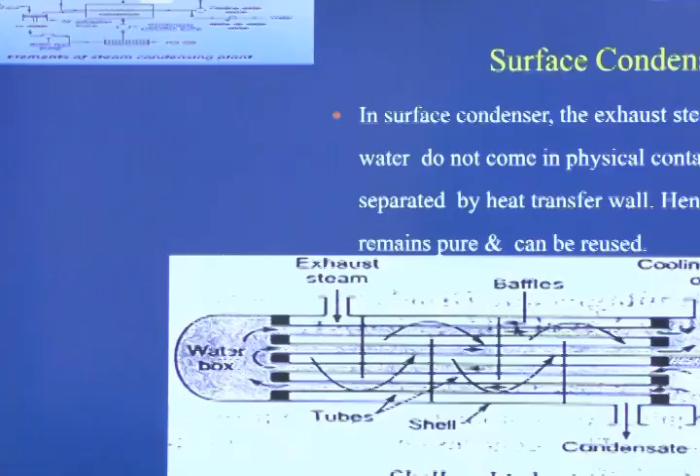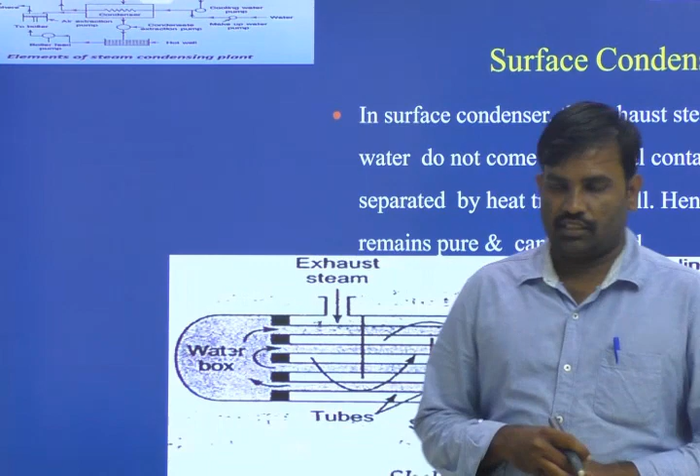In the previous lesson we discussed about jet condensers: the different types of jet condensers, how we convert exhaust steam into hot water with the help of cooling water, how we reduce the temperature of exhaust steam using a cooling medium, how we remove air and uncondensable gases from jet condensers, and what are the advantages and disadvantages of using jet condensers, which is why we are introducing surface condensers.

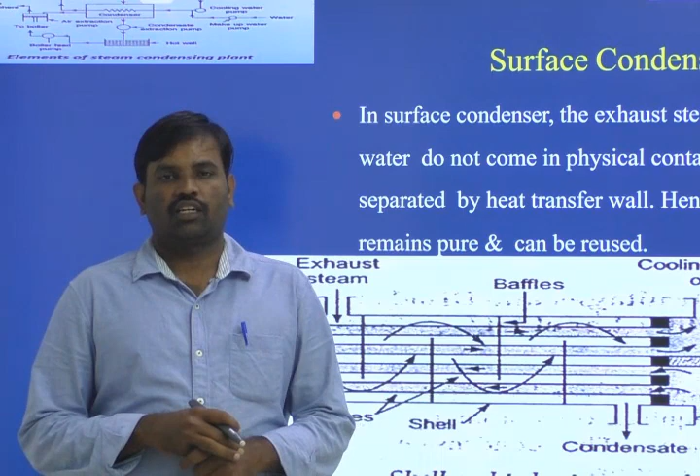Today we will see the different types of surface condensers, how we reduce the temperature of exhaust steam in surface condensers, and compared to jet condensers, what is the advantage of using surface condensers in the steam condensing plant.

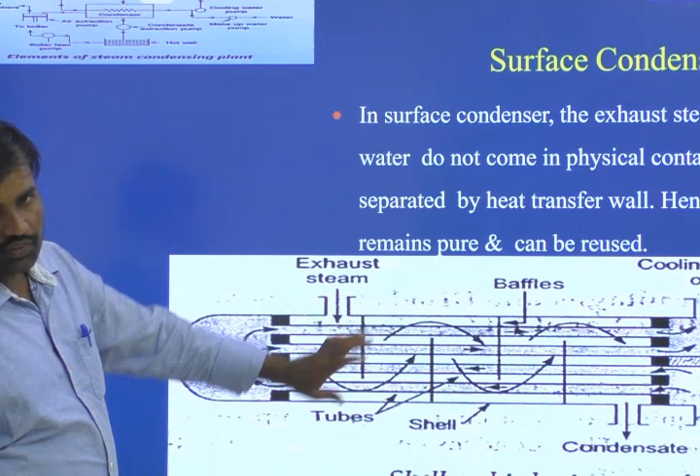Let us see the operation of surface condenser. The basic objective of a surface condenser is shown in this figure, where you can see the flow direction of exhaust steam and cooling water, and how the exhaust steam exchanges its heat to the cooling water inside the condenser section.

In a surface condenser, the exhaust steam and cooling water do not come into physical contact; rather they are separated by the heat transfer surface of the tubes. Hence the condensate remains pure and can be reused.

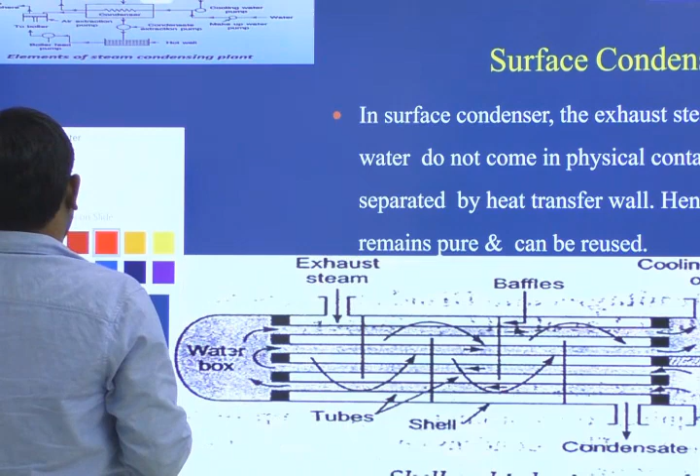In case of jet condensers, the condensate mixture is not pure. In case of surface condensers, the condensate mixture is pure and can be reused. We can reuse the condensate mixture coming from the surface condensers.

The arrangement of the surface condenser is like this: exhaust steam is introduced into the surface condenser and made to flow over the tubes, while inside the tubes we arrange the flow of cooling water. During this flow process, the exhaust steam and cooling water exchange heat through the thickness of the tubes.

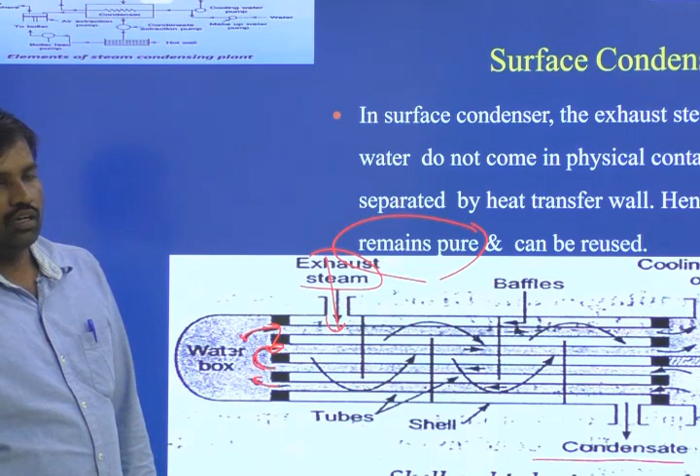Then automatically the exhaust steam is converted into condensate mixture. That condensate mixture is collected and sent to the boiler section with the help of a feed water pump.

Next, the downflow type of surface condenser. See the arrangement: exhaust steam enters into the mesh of the surface condenser, meaning the flow of water inside smaller tubes, which we see as a mesh. Inside the tubes we make the water flow, and over the tubes we arrange the flow of exhaust steam from the steam turbine.

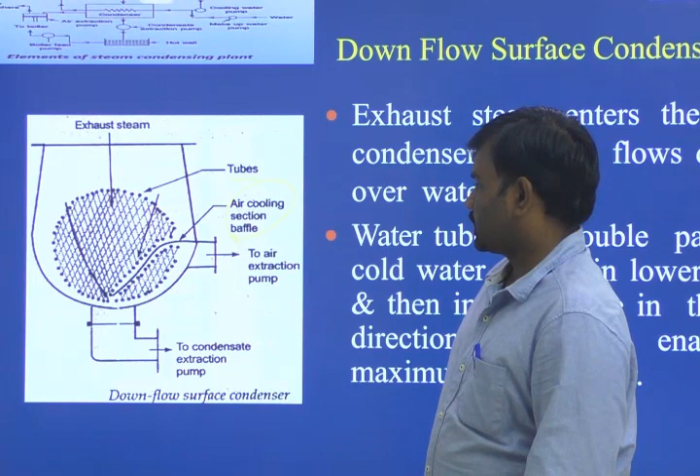The steam then goes to the air extraction pump, where we extract the uncondensable gases from the condenser body in order to maintain vacuum pressure inside the condenser.

Then to the condensate extraction pump, we introduce the condensate mixture to the pump, and the condensate mixture is sent back to the boiler section for reuse.

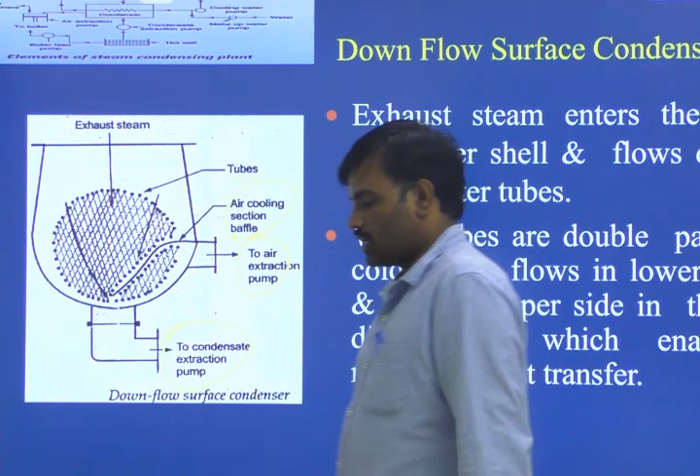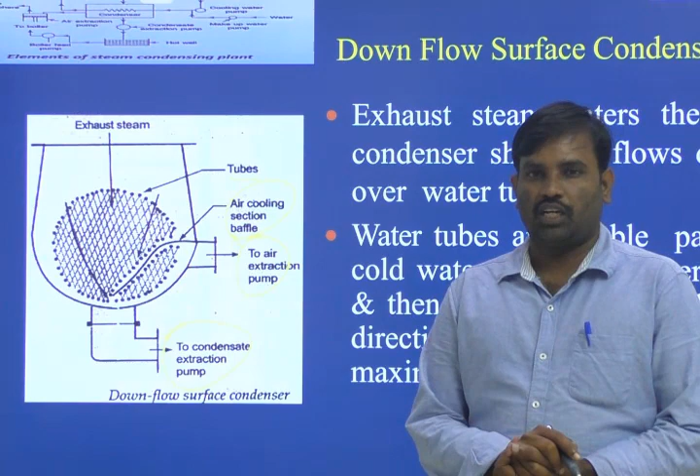One of the most important advantages of surface condensers is that we can reuse the condensate mixture after the condensation process. In case of jet condensers, we are not reusing the condensate mixture and not sending it to the boiler section. Only with surface condensers can we reuse it.

Why? Because there are no dust particles and metal particles, since there is no mixing. In jet condensers, both the hot fluid and cold fluid mix together inside the condenser section during the flow process. In surface condensers, both fluids do not mix and instead exchange heat through the thickness of the tubes. That is the main difference between surface condensers and jet condensers.

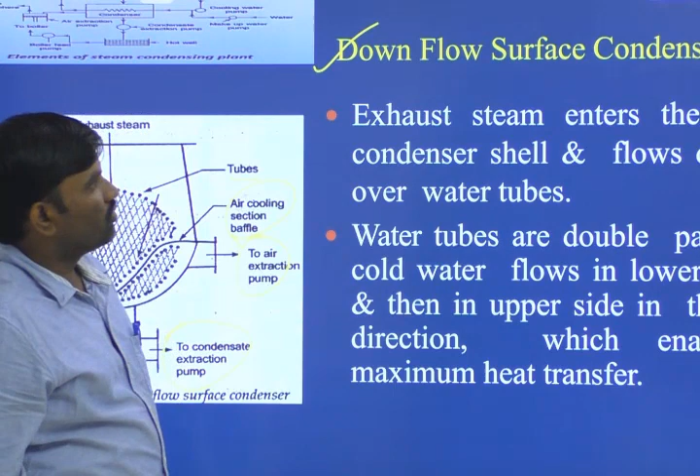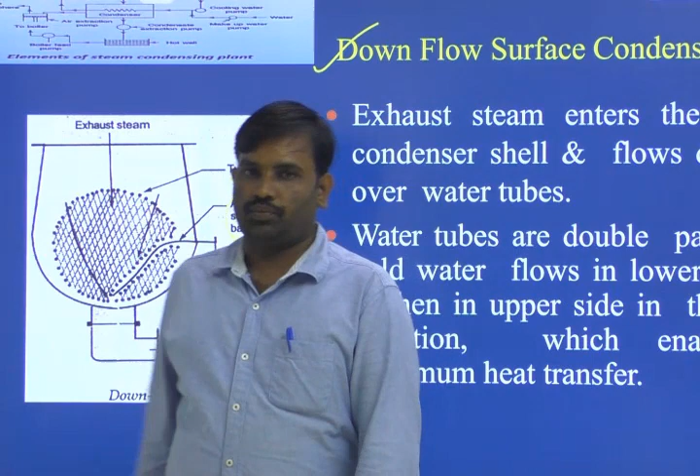See the next type, the downflow type of surface condenser. Exhaust steam enters the top of the condenser shell and flows downward over the water tubes. You can see the arrangement: the exhaust steam flows in the downward direction over the tubes, and inside the tubes we arrange the flow of water.

Inside the tubes, water is flowing, that is the cooling medium, and over the tubes, we make the exhaust steam flow. During the flow process, the exhaust steam exchanges its heat to the cooling water.

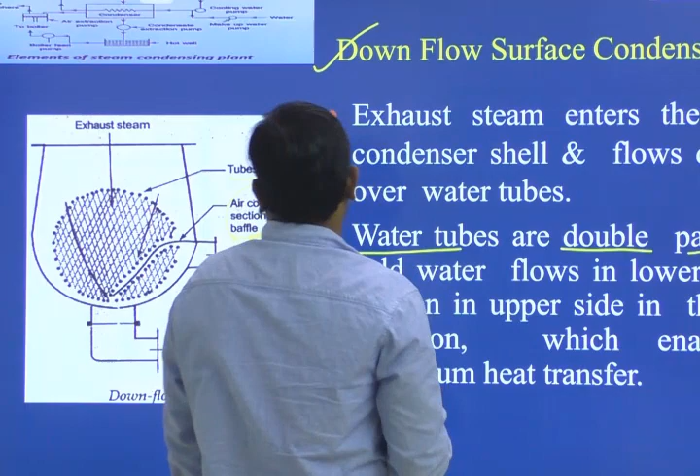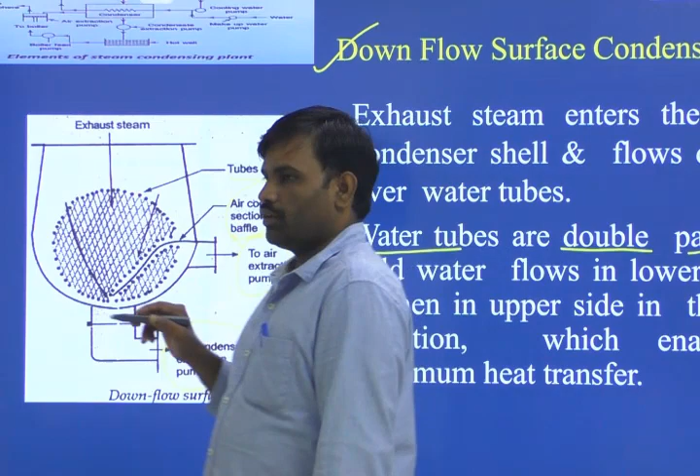Water tubes are double passed type, and the cold water flows in the lower side first and then in the upper side, in reverse direction, which enables maximum heat transfer. Double passed type means the water flows inside the tubes two times. In one pass we exchange heat, and in the second pass we also exchange heat. Two times exchanging means more heat transfer takes place between the hot fluid and cold fluid, so we can extract more heat from the exhaust steam.

Then we can easily convert the exhaust steam into a pure condensate mixture. That pure condensate mixture we send to the boiler section for reuse in generating exhaust steam. After generating the steam, we again reintroduce it into the steam turbine, and from the steam turbine we produce the power output.

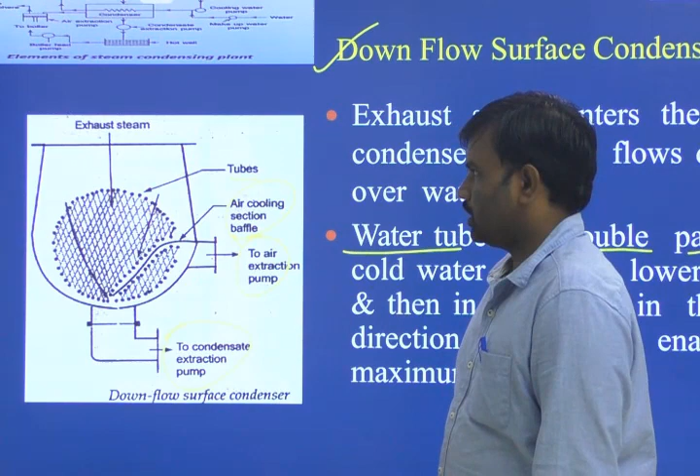After that, the exhaust steam again enters the surface condenser. In that manner we repeatedly operate the steam power plant with the help of different types of surface condensers, continuously receiving the exhaust steam from the steam turbine.

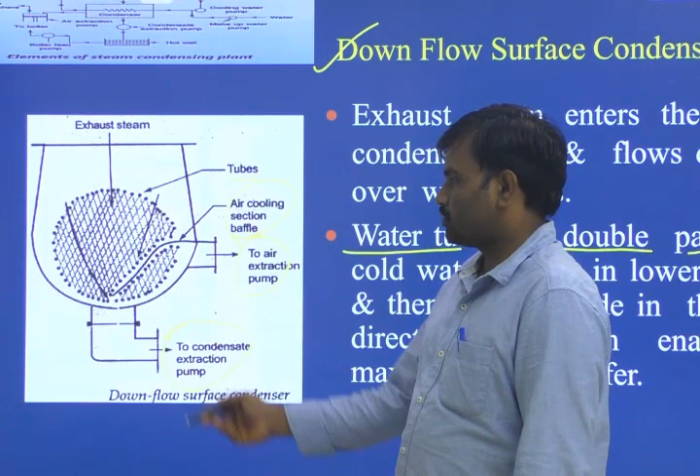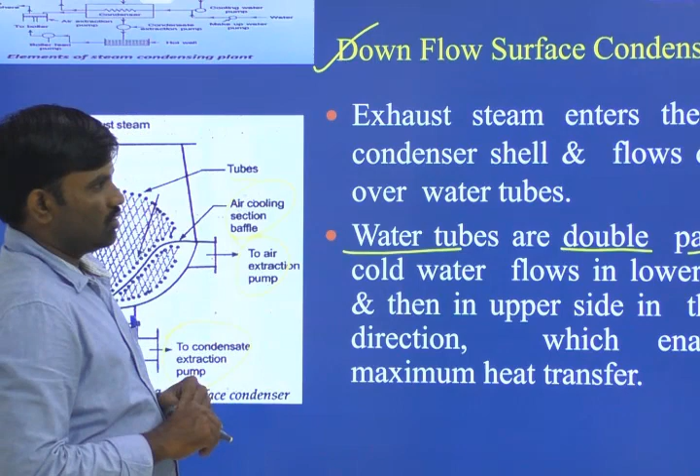During the heat extraction process, heat exchange takes place from hot fluid to cold fluid, meaning the exhaust steam exchanges its heat to the cold water flowing inside the tubes. In the downflow type of surface condenser, the tubes are double pass type. Because of double pass, double heat exchange takes place between hot and cold fluid, reducing the temperature of the exhaust steam and converting it into condensate mixture, that is hot water. We arrange the flow direction of hot fluid and cold fluid based on the type of condenser.

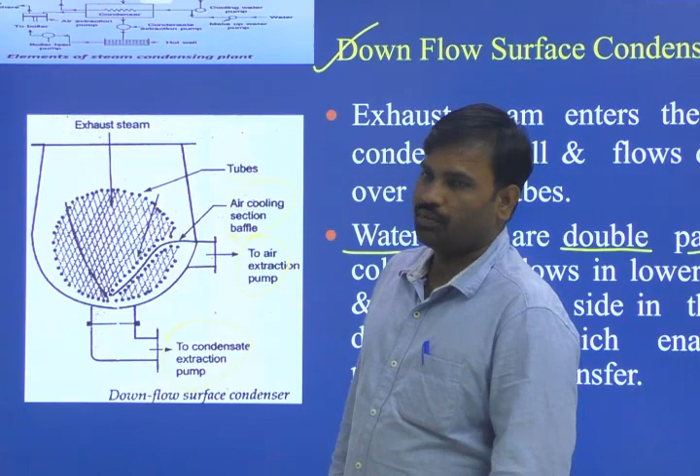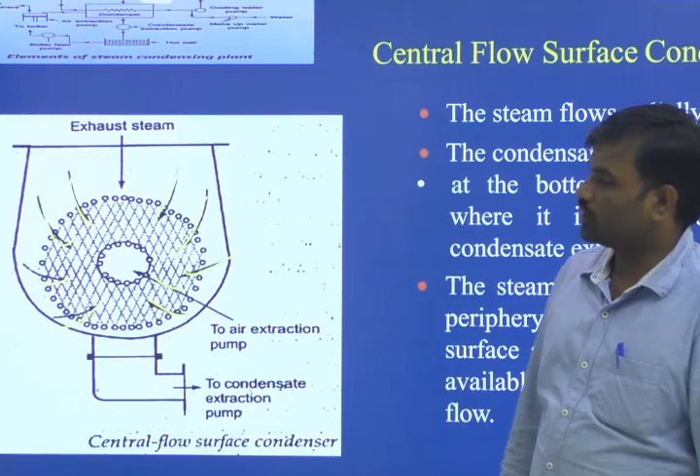Next, the central flow type of surface condenser. The steam flows radially inward. In the previous type of surface condenser, the steam flows downwards, but in this type, the steam flows radially inward, entering the condenser section through the radius. Because of more entering points, we can increase the heat transfer rate in the central flow type of surface condenser.

The condensate is collected at the bottom of the shell, from where it is taken out by the condensate extraction pump. Always remember, the pump handles only liquid, that is condensate. If the condensate is not completely condensed into hot water, then we are unable to extract it with the condensate pump. For that reason, we use higher efficiency condensers for condensing the exhaust steam into hot water.

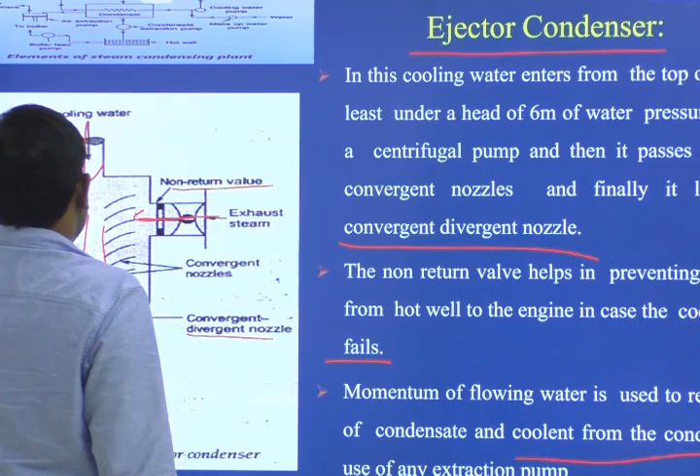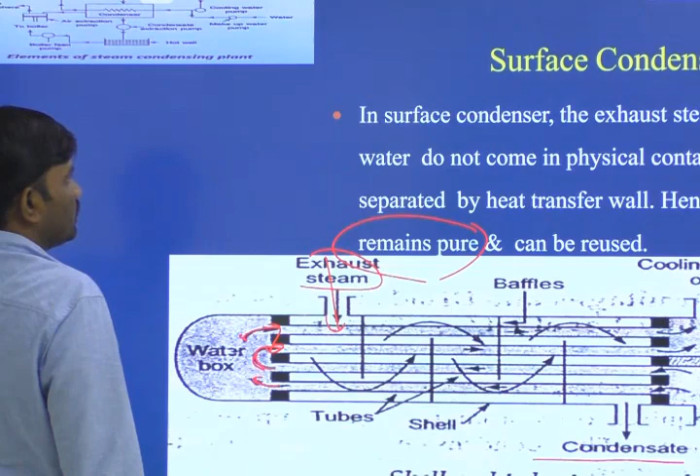The steam gets access to the entire periphery of the tubes, and thus a larger surface area for heat transfer is available compared to the downflow type. In the downflow type, we only introduce the steam from the downward direction, but in the central flow type of surface condenser, we introduce the exhaust steam through the radius, throughout the periphery, which helps us increase the heat transfer rate.

As I already told you, in surface condensers, compared to jet condensers, we are not mixing the two fluids. The hot fluid and cold fluid do not mix together inside the surface condenser. Only heat exchange takes place through the thickness of the tubes, and in that manner we exchange heat between the hot fluid and cold fluid, and for that reason we get pure condensate.

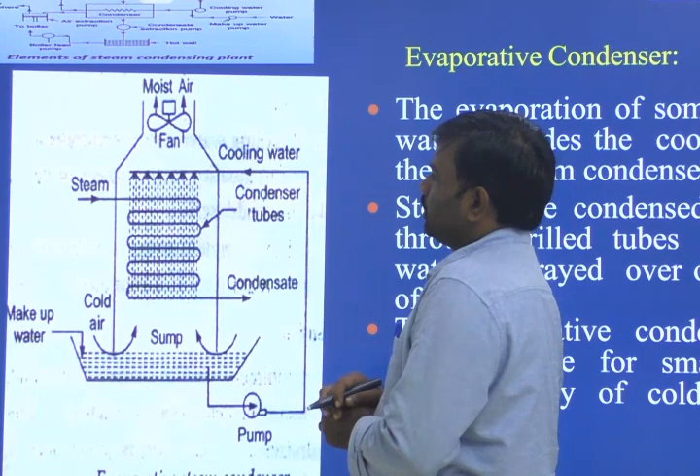That pure condensate we are using as hot water from the steam condenser, and from the steam condenser we are reusing the hot water for generating steam in the boiler section. See the evaporative type of condenser section. Here we are introducing two types of cooling mediums. Up to now we discussed only one cooling medium, that is cooling water, which we use to exchange heat between the exhaust steam and water. Both fluids exchange heat between each other.

In case of the evaporative type of condenser section, we are using air and cooling water. Both exchange heat between them and easily condense the exhaust steam into a condensate mixture, which as hot water we reuse in the boiler section.

See how to introduce the cooling water into the evaporative type of condenser, and how we use air as cooling medium in this section. Moist air is introduced into the outside atmosphere, and that moist air also carries some quantity of heat from the exhaust steam. The steam enters into the condenser tubes from the steam turbine.

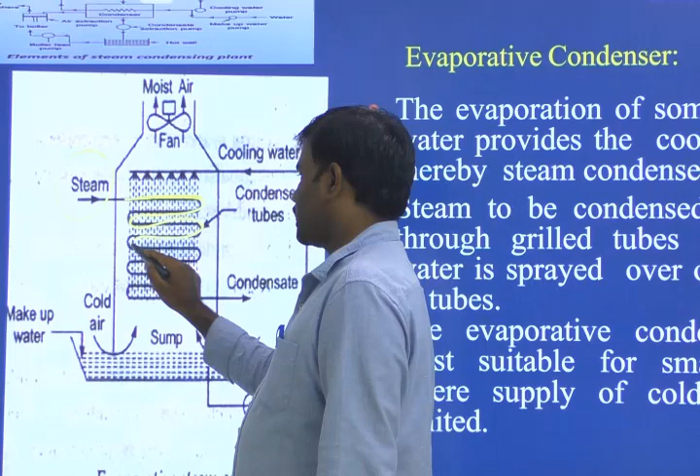The steam is flowing inside the tubes of the evaporative condenser. During the circulation process, over the tubes we make water and air flow. The cooling water is sprayed over the tubes. See the arrangement: from the sump we introduce the sprayed water, which flows over the tubes and extracts heat from the exhaust steam. Inside the tubes exhaust steam is flowing, and over the tubes we arrange the spray of cooling water. Because of the spray, we can increase the area available for heat transfer.

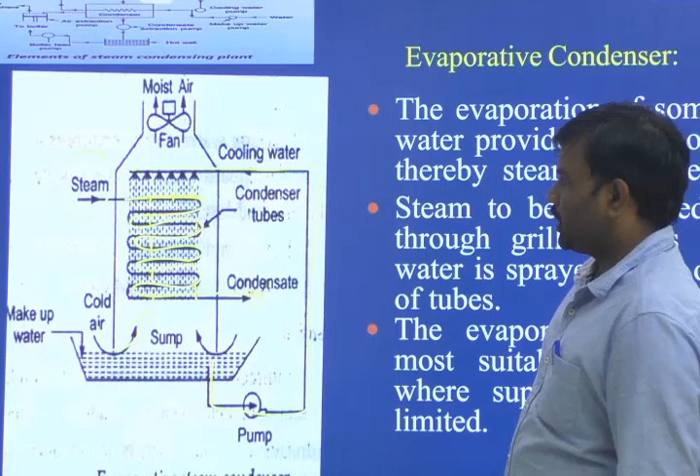Then automatically the exhaust steam temperature decreases and the exhaust steam converts into condensate mixture. From the bottom side itself we introduce the air, which flows in the upward direction. Because of the air flowing upward and the sprayed water flowing downward, the combined effect of sprayed cooling water and the cold air reduces the temperature of the exhaust steam and converts it into condensate mixture, which we reuse as feed water to the boiler section.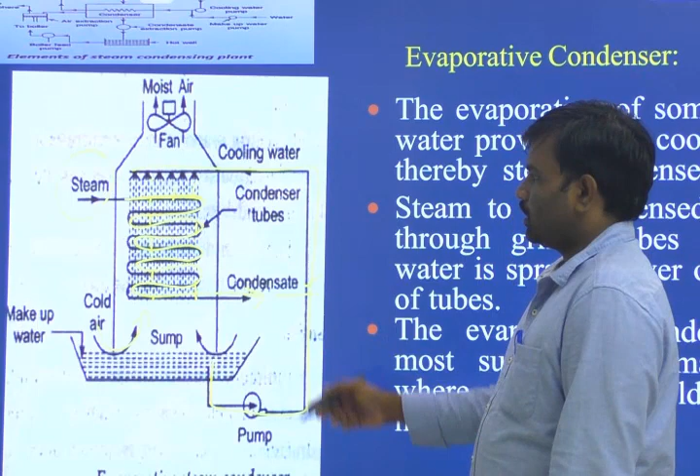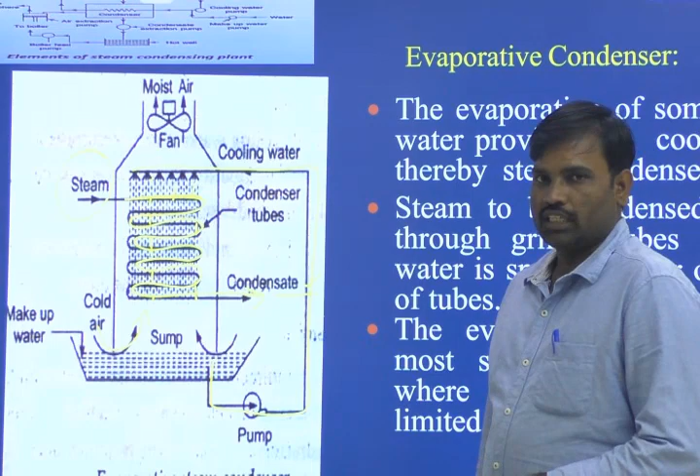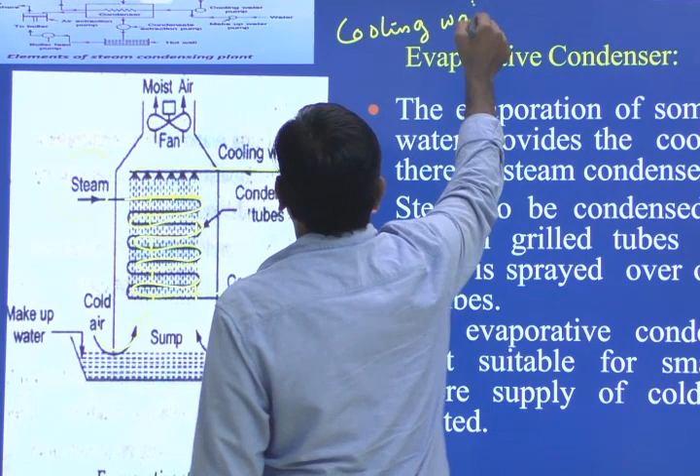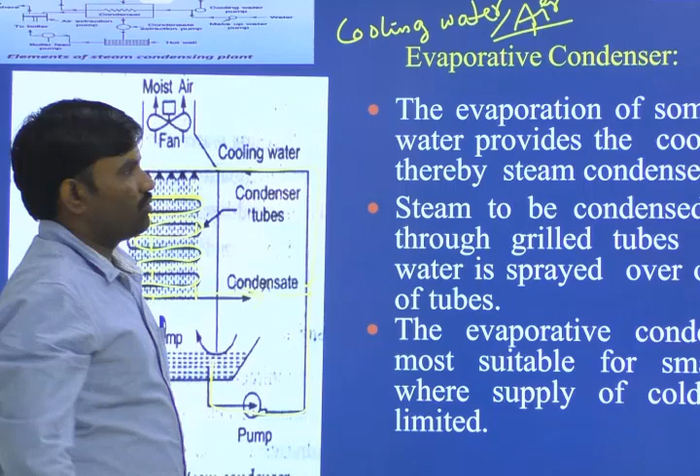In case of the evaporative type of condenser, we use cooling water and air as cooling mediums. Up to now we saw only cooling water as cooling medium. Here, cooling water plus air are used together. With the help of the combined effect of cooling water and air, we reduce the temperature of the exhaust steam. In the evaporative condenser, the sprayed water is evaporating, because during the heat extraction process that sprayed water evaporates, and the evaporation of some cooling water provides the cooling effect.

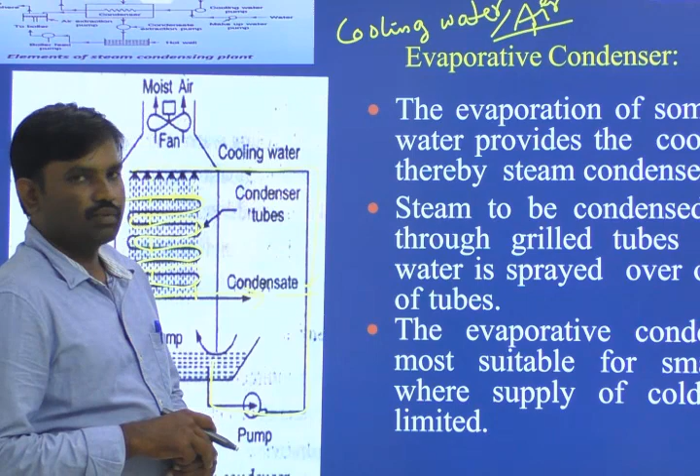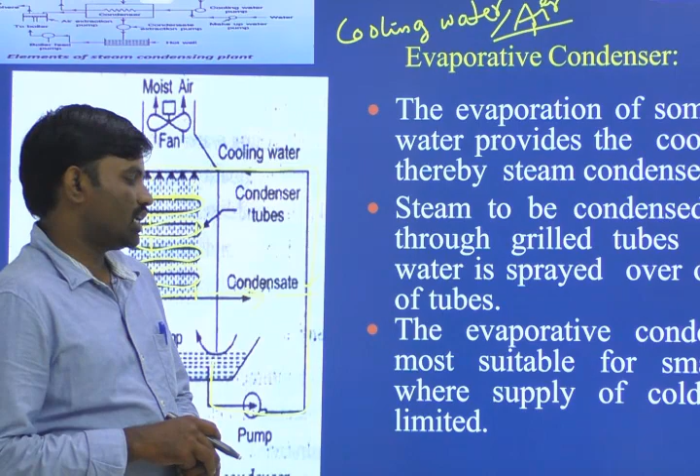Thereby the steam condenses. The steam to be condensed is passed through the grilled tubes and cooling water is sprayed over the outer surface of the tubes. The evaporative condensers are most suitable for small plants and where the supply of cold water is limited. We supply the cold water with the help of this evaporative type of condenser.

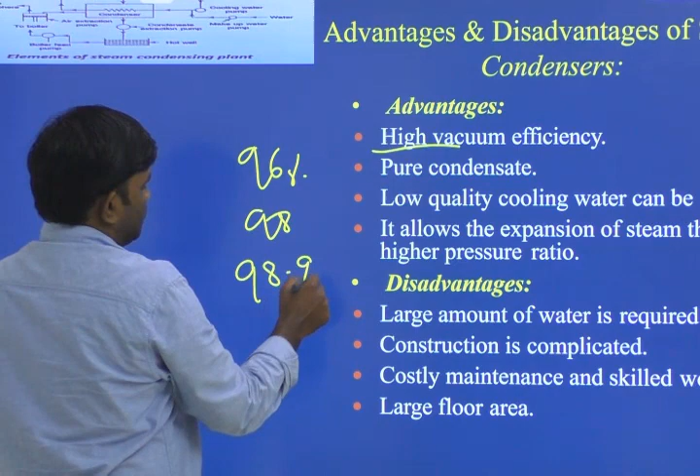Advantages and disadvantages of a surface condenser. See the advantages of surface condensers: we use the surface condenser for high vacuum efficiency. We always have to maintain higher vacuum efficiency. While solving problems, we get condenser efficiency values like 96%, 98%, 98.9%, and so on, which represent the vacuum efficiency of the condenser. This is because higher vacuum efficiency helps us extract the low pressure exhaust steam from the steam turbine. If there is no higher vacuum efficiency, then automatically the exhaust steam may not enter into the steam condenser device.

For that reason, we are providing higher vacuum efficient condensers to the steam power plants. We get pure condensate from surface condensers, and low quality cooling water can also be used, because the cooling water and exhaust steam are not mixing together. If there is mixing inside the condenser, there is a possibility of impurity in the condensate mixture. Since there is no mixing of cooling water and exhaust steam, we can use low quality cooling water.

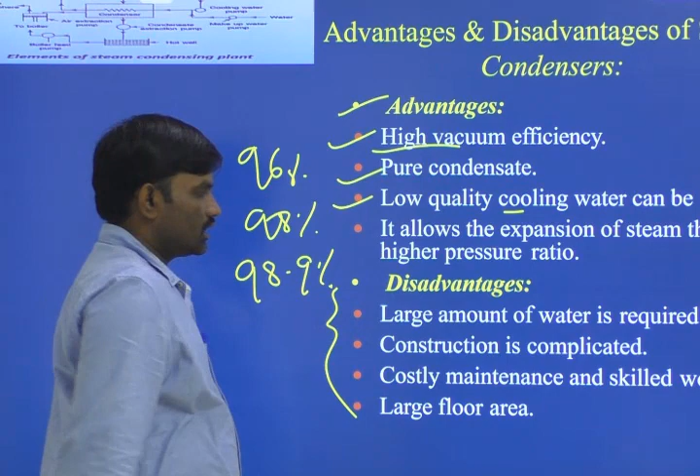Disadvantages of surface condensers are: a large amount of water is required, construction is complicated, costly maintenance and skilled workers are required, and a large floor area is required. These are the disadvantages of surface condensers.

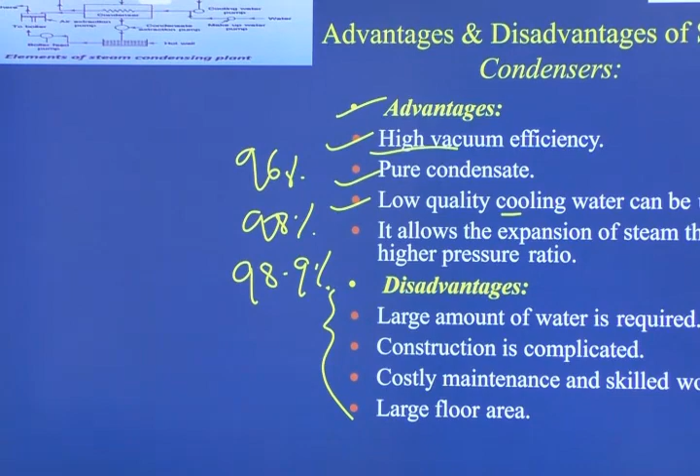Next, comparison of jet and surface condensers. If you compare the two types of condensers, jet condensers and surface condensers, you can know the advantages and benefits of both types.

In jet condensers, the cooling water and steam are mixed up. In case of surface condensers, both are not mixing together. In case of jet condensers, it requires a small floor space, while in case of surface condensers, it requires more space.

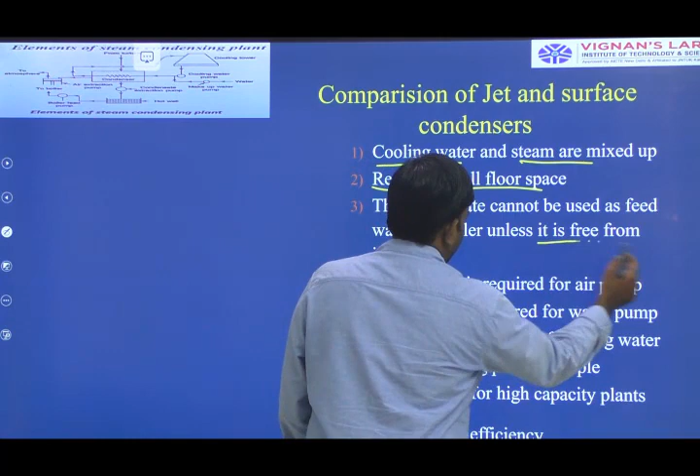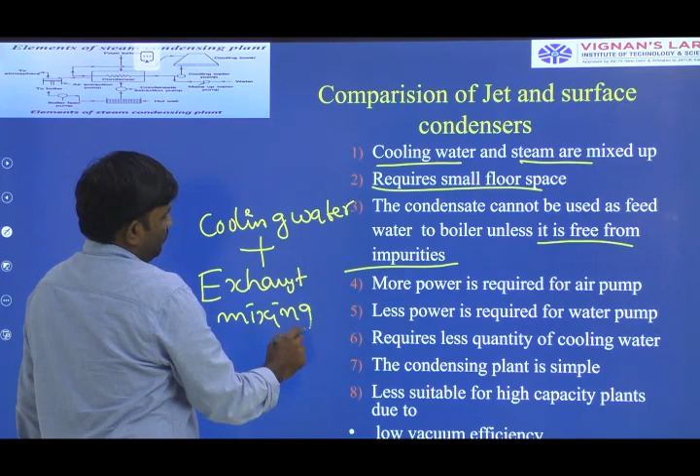The condensate cannot be used as feed water to the boiler unless it is free from impurities. We are not reusing the condensate as feed water to the boiler section in case of jet condensers, because the cooling water plus exhaust steam are mixing. For that reason, we are not using the condensate as feed water.

More power is required for the air pump. In order to operate the air pump, we have to give more power input, and then only the air pump extracts the air from the condenser section.

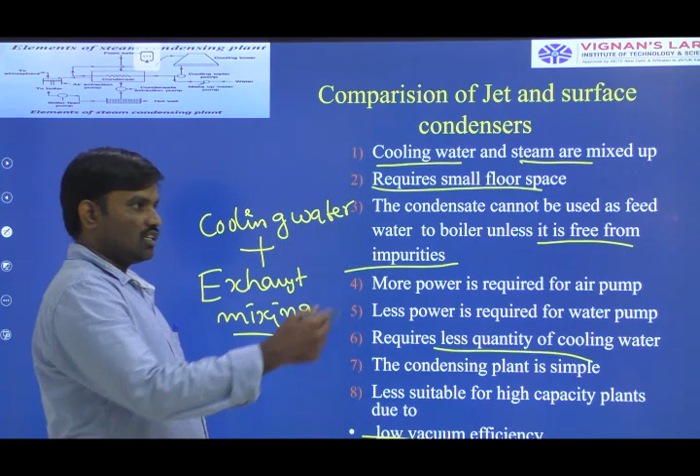Less power is required for the water pump, and it requires less quantity of cooling water. Less quantity of cooling water is needed because mixing reduces the cooling water requirement. The condensing plant is simple and less suitable for high capacity plants due to low vacuum efficiency. The vacuum efficiency is also low for jet condensers compared to surface condensers.

Next, see the comparison of jet condensers and surface condensers. In case of surface condensers, cooling water and steam are not mixing together. Surface condensers require a large floor area, and condensate can be used as feed water to the boiler as it is not mixed up with cooling water.

Less power is required for the air pump, more power is required for the water pump, and it requires a large quantity of cooling water. Cooling water requirement is more because there is no direct physical contact between the cooling water and exhaust steam. For that reason, a large quantity of cooling water is required for the surface type condenser.

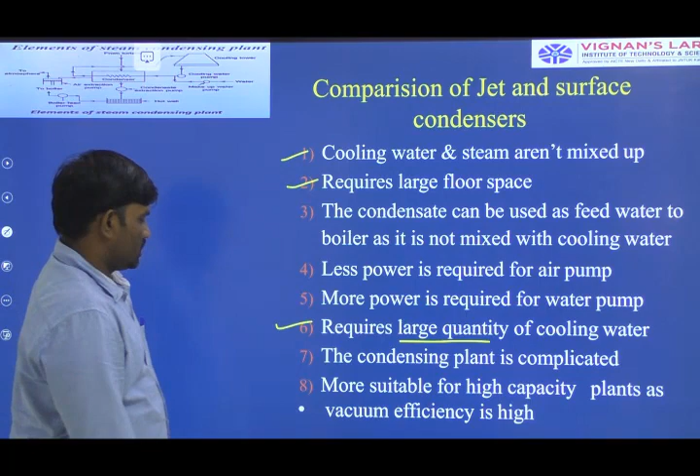The condensing plant design is complicated, and it is more suitable for high capacity plants as vacuum efficiency is high. In case of surface condensers, vacuum efficiency is high, and in case of jet condensers, vacuum efficiency is low.

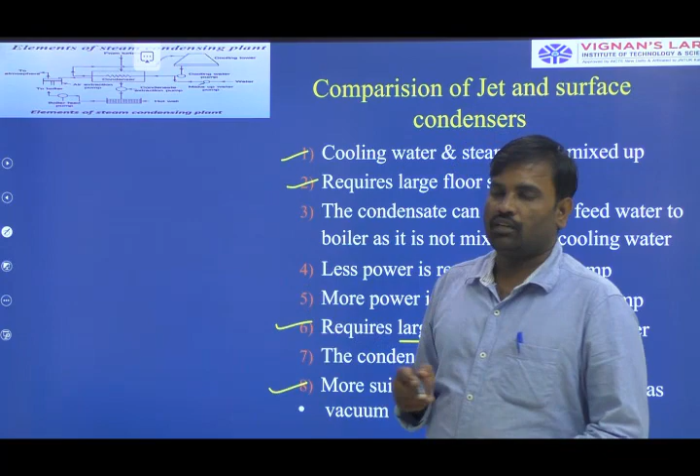In case of jet condensers, both cooling water and exhaust steam are mixing together. Because of that mixing, the cooling water requirement is less — a lesser quantity of cooling water is sufficient for reducing the temperature of exhaust steam.

Sources of air in the condenser. We remove air in the condenser because we have to maintain low vacuum pressure in the condenser section, in order to extract low pressure steam from the steam turbine, whatever the turbine may be — impulse turbine or reaction turbine used in the steam power plant — both turbines require high vacuum efficiency condensers.

The ambient air leaks into the condenser chamber at the joints, where atmospheric air enters the condenser, which is internally under pressure lower than that of the ambient. Another source of air is the dissolved air with feed water. That dissolved air and dissolved gases in feed water have to be removed with the help of an air extraction pump.

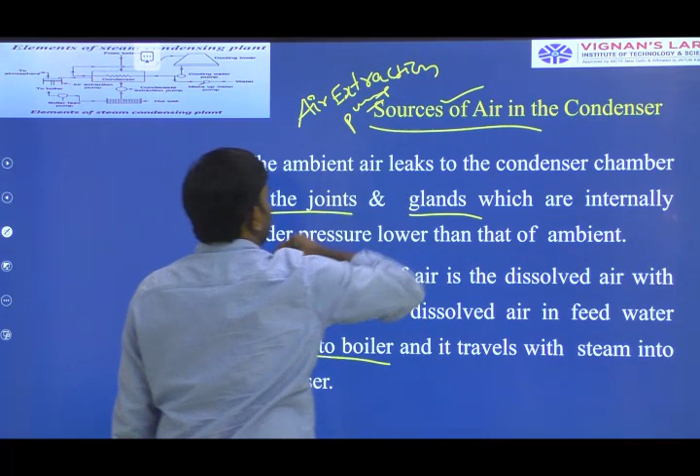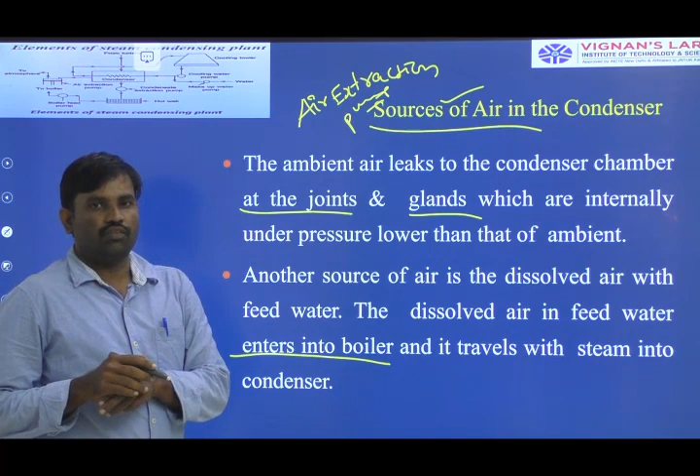With the help of the air extraction pump only, we are extracting the air from the steam condenser. What are the sources of that air? Through the joints, and the dissolved gases or dissolved air in the water produces the air. That air has pressure, so we have to remove the air from the condenser section.

Effects of air leakage: some effects we can observe during the leakage of air into the condenser section. The presence of air lowers the vacuum in the condenser. We always have to maintain the vacuum efficiency at 97, 98, or 99 percent. If air enters, the vacuum pressure decreases, so we have to remove the air with the help of the air extraction pump.

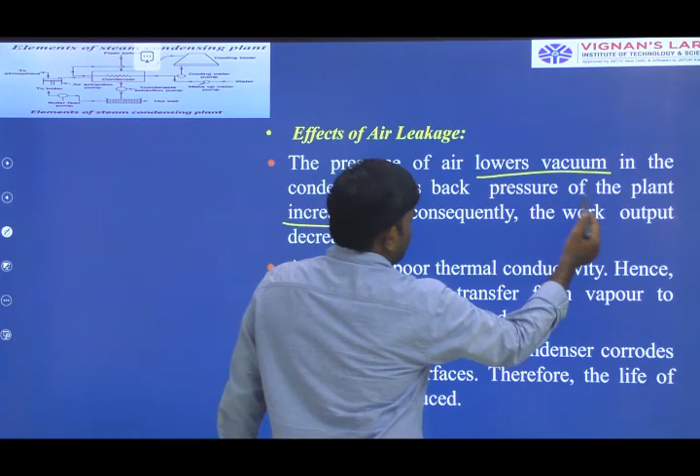The presence of air lowers the vacuum pressure, and the back pressure of the plant increases. Back pressure increases, and work output also decreases.

Air has very poor thermal conductivity. Hence the rate of heat transfer from vapor to the cooling medium is reduced. If more air enters, it reduces the heat transfer rate between the exhaust steam and the cooling medium.

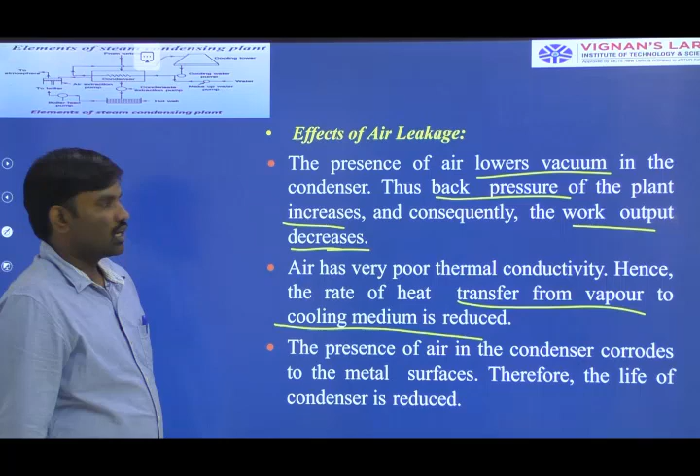Then the condensate mixture does not remain pure from the condenser section if there is air leakage. The presence of air in the condenser corrodes the metal surfaces. For that reason, we have to extract the air with the help of an air pump.

Vacuum creation in the condenser. What is the necessity of creating vacuum inside the condenser? Is it very necessary or not? We have to discuss this. Yes, it is very necessary, and for that purpose only we are using the air extraction pump. In the previous slide we saw how air enters into the condenser and how we extract the air from the condenser in order to create the vacuum.

That vacuum creation in the condenser will help us. When the steam condenses in a closed vessel, the vapor phase of the working substance changes to liquid phase. Exhaust steam is condensing inside the condenser and converting into liquid phase. Thus, its specific volume reduces by more than 1000 times.

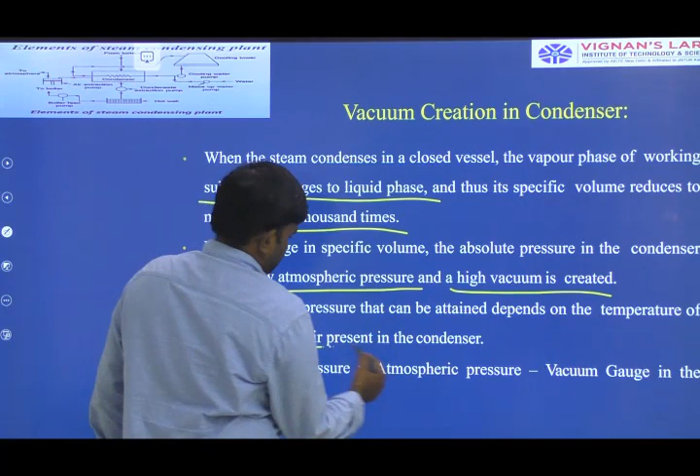Specific volume reduces, and due to this change in specific volume, the absolute pressure in the condenser falls below atmospheric pressure, and high vacuum is created. This minimum pressure that can be attained depends on the temperature of the condensate and the air present in the condenser. Because of these two parameters only, we can maintain the vacuum in the condenser section.

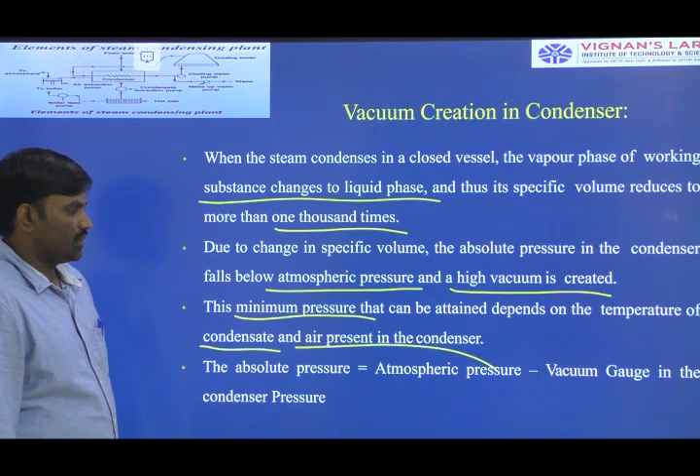The absolute pressure is equal to atmospheric pressure minus vacuum pressure in the condenser section. These are the main important points.

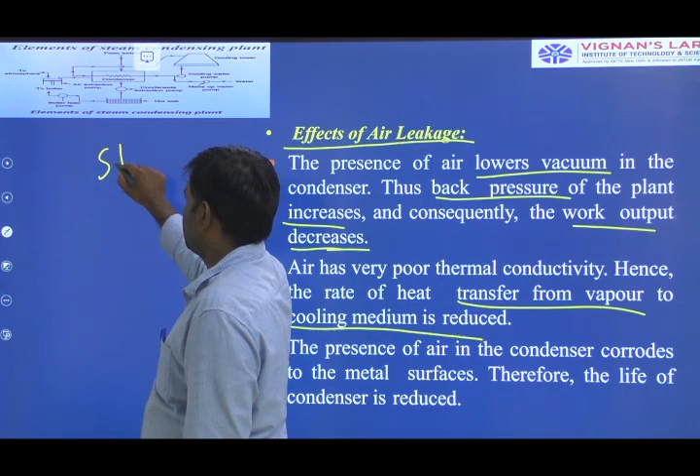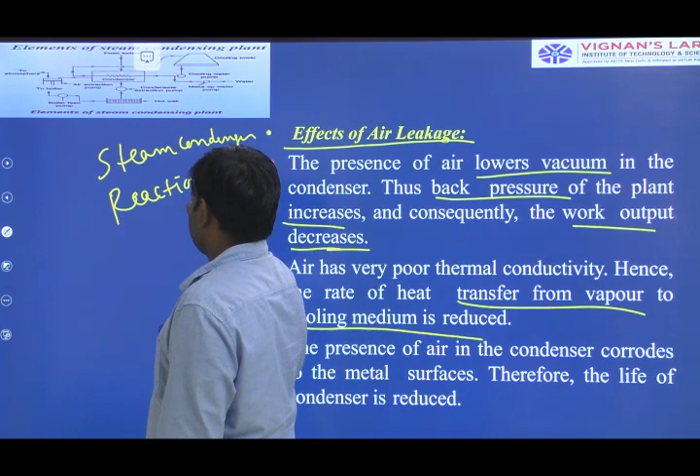In the fourth unit, we have two topics. One is steam condensers, and the second one is reaction turbine.

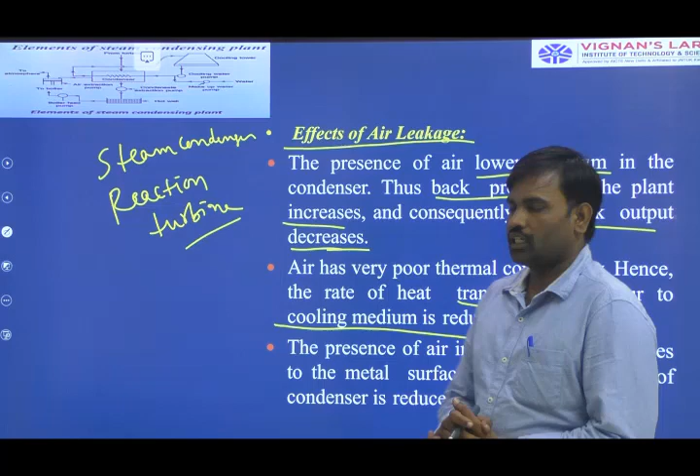In case of steam condensers, we use different types, and all types have the same purpose and objective: reducing the temperature of exhaust steam and extracting the low pressure exhaust steam from the steam turbine. After condensation, we send the condensate mixture from the condenser to the boiler section as feed water, for the next cyclic generation of steam. For that reason, we use two different types of condensers.

One is jet condenser and the second is surface condenser. In case of jet condensers, exhaust steam and cooling water both mix together. We use cooling water as the cooling medium to reduce the temperature of the exhaust steam. The exhaust steam and cooling water exchange heat, and the exhaust steam temperature decreases, converting into condensate mixture.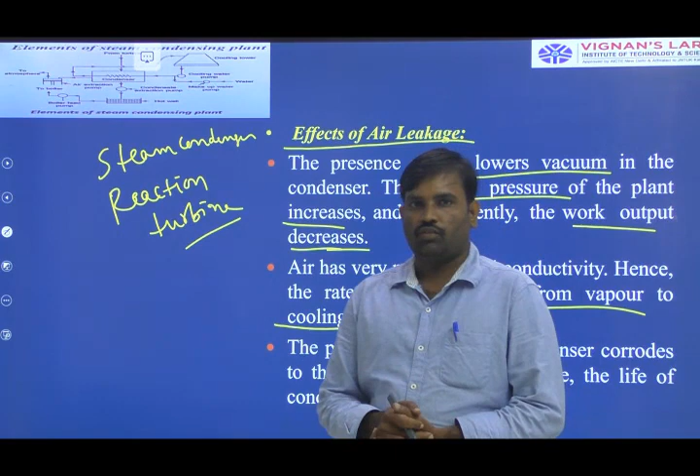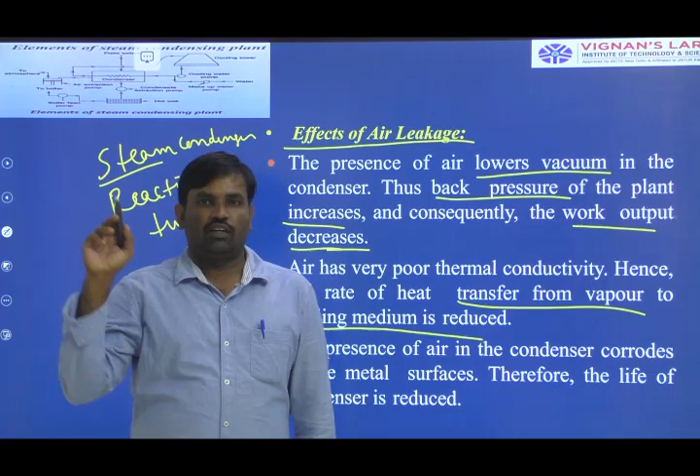That condensate mixture, as hot water, is sent back to the boiler section for generation of steam. In case of surface condenser, both fluids do not mix together, but in case of jet condenser, both fluids mix together. Next class, we will see some problems on different types of steam condensers, on jet condensers and surface condensers. Thank you.